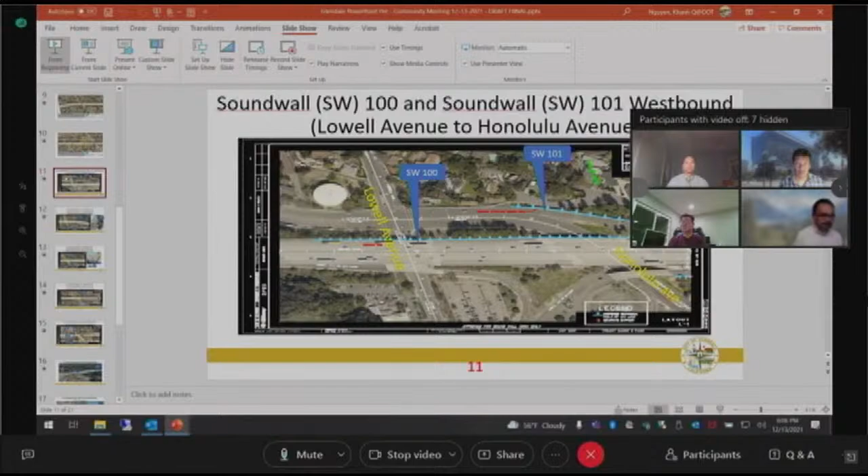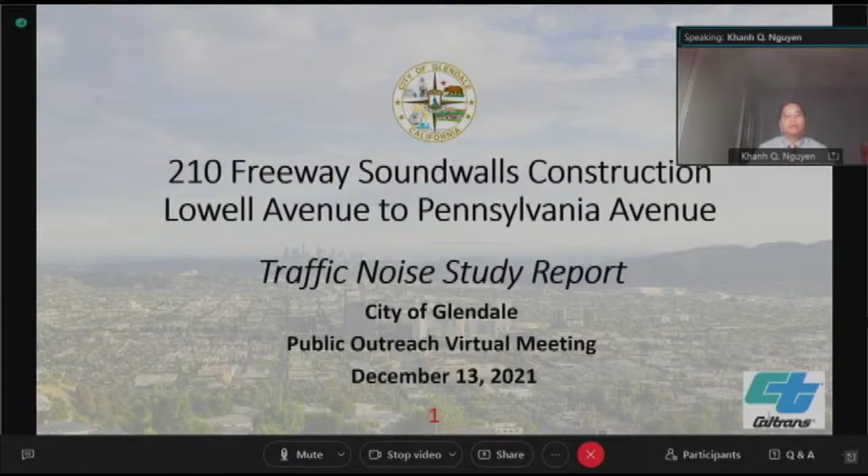Good evening, everyone. I am Khanh Nguyen, project engineer for this Soundwall project. First, I would like to appreciate your valuable time attending the outreach meeting. Second, I would like to take this opportunity to thank City of Glendale for your support in preparing the Soundwall project study report, project report, PSR-PR. A Soundwall project at the planning stage. Your feedback and input are really important to us. Soundwall construction will be in Interstate 210 freeway from Lowell Avenue to Pennsylvania Avenue.

From Caltrans with me today, I have Office Chief, Project Special Study, Marco Bueno. Project Manager, Rima Tabaliva. Senior Engineer from Design, Terry Martinez. Senior Engineer from Noise and Vibration, Jin Lee. Senior Environmental Planner, Robert Wang, and myself.

The project background objectives are: the City of Glendale Foothill community has inquired about constructing a soundwall along the Interstate 210 freeway to mitigate the freeway traffic noise. The City of Glendale retained the Department of Transportation, also known as Caltrans, to prepare the traffic noise study report to evaluate the existing traffic noise impact along Interstate 210 freeway in the City of Glendale. The purpose of the noise study is to collect and analyze freeway noise data, and identify type, locations, and dimensions of a sound barrier along the Interstate 210 freeway between Lowell Avenue and Pennsylvania Avenue.

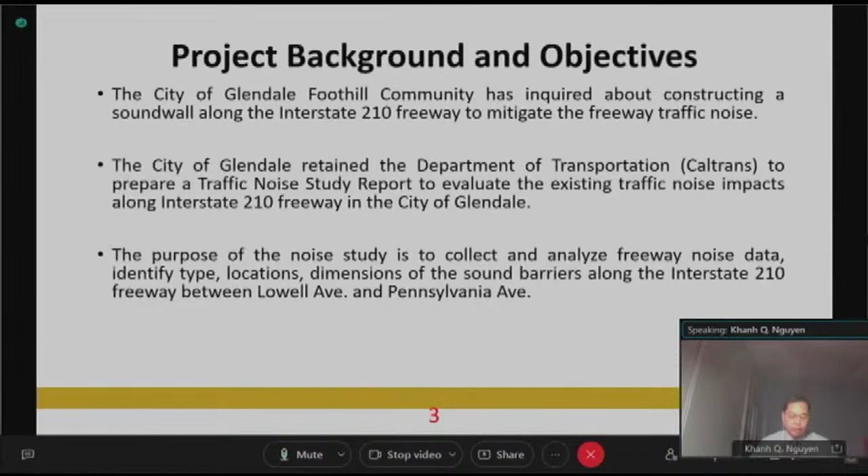There are 5 phases in the project milestone. Phase 1, prepare environmental document, including the traffic noise study. Phase 2, hold a community meeting, inform the public of the scope of work and project progress. Phase 3, retain the public or private firm to prepare plans, specifications, and cost estimate for construction phase. Phase 4, secure proper funding for construction phase of the sound barriers. Last phase, phase number 5, is prepare project schedule, advertise, and award for the construction phase.

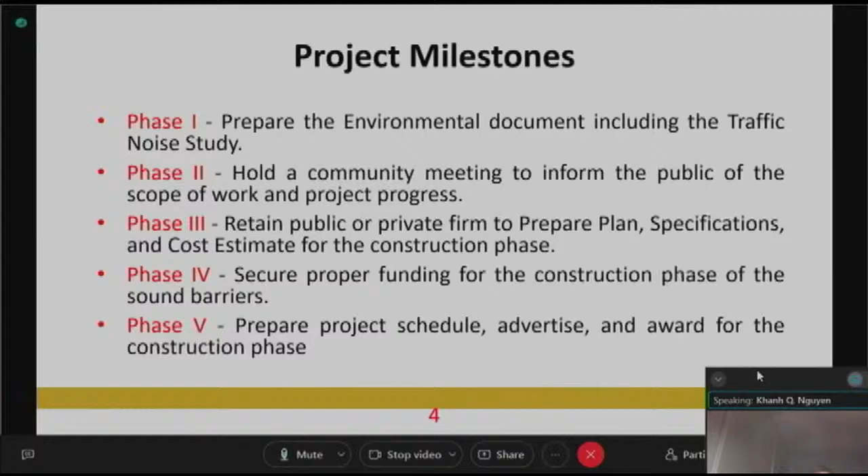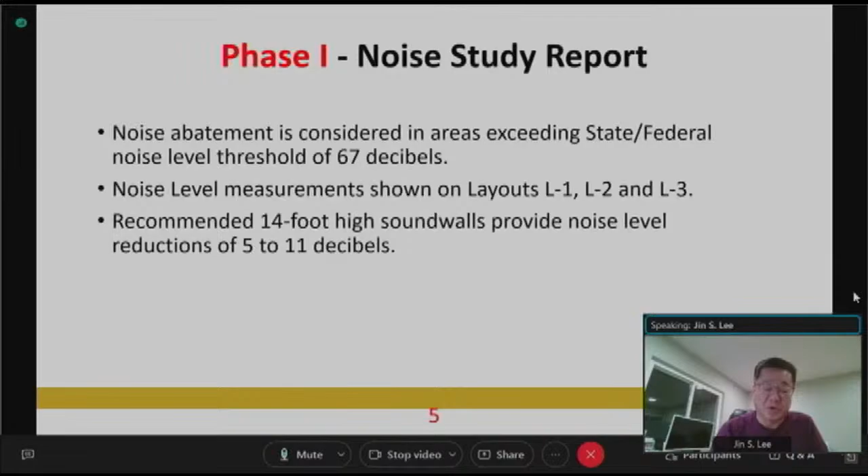This slide, I will have Jin Lee, who is a senior engineer from Noise and Vibration, to talk about this one. Good evening. My name is Jin Lee with Caltrans, Noise and Vibration. For this slide, I would like to provide a brief overview of the state and federal noise policies, as well as some sound wall noise reduction information.

First of all, in order for residential homes to qualify for noise barrier or noise abatement consideration, the noise levels have to be at least 67 decibels or above. Another criterion is that the homes along the freeway have to predate the construction of the freeway. In this area along the 210 freeway, I believe most homes predated the 210 freeway, so most of the area does qualify for noise abatement

considerations. Later on, I'll be showing the noise levels that we measured along the 210 freeway between Lowell Avenue and Pennsylvania Avenue. Based on our study, much of the area qualifies for noise barrier considerations. Based on our computer modeling and analysis, we determined that the 14-foot high sound wall between Lowell Avenue and Pennsylvania Avenue provides a noise reduction of 5 to 11 decibels to the nearby homes.

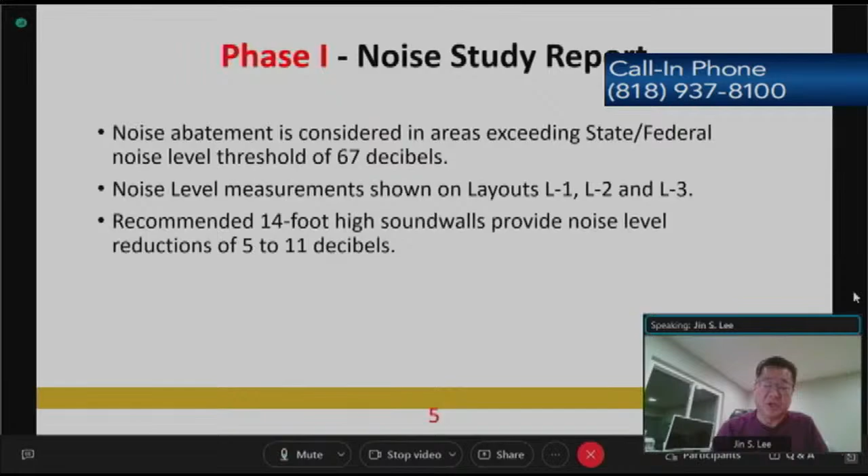This does not mean that everybody behind the sound wall will benefit. The sound wall or noise barrier is most effective for homes about 300 to 400 feet from the sound wall. Anything farther away than that, the amount of benefit diminishes, any change in the noise levels. In terms

some people perceive a change of 3 decibels. A 5 decibel change is readily perceivable by normal human ears, and a 10 decibel change is considered half as loud or twice as loud, whether the noise level increases or decreases. Okay. For this area, 5 to 11 decibels, so it does provide sufficient benefit to the

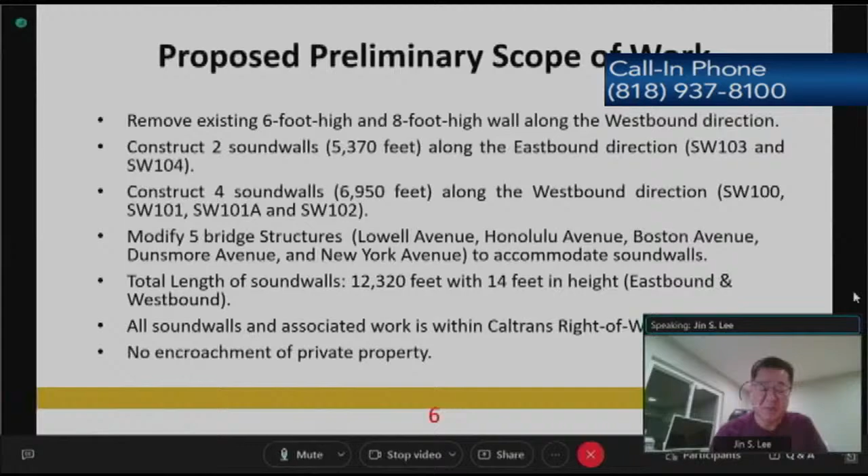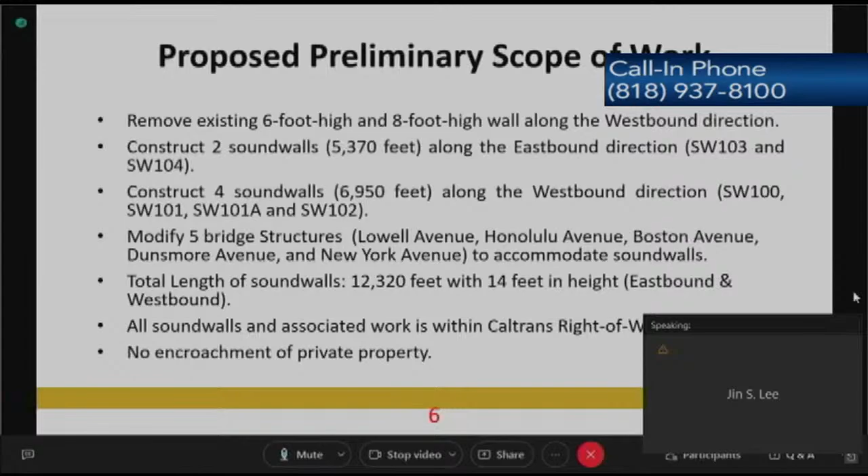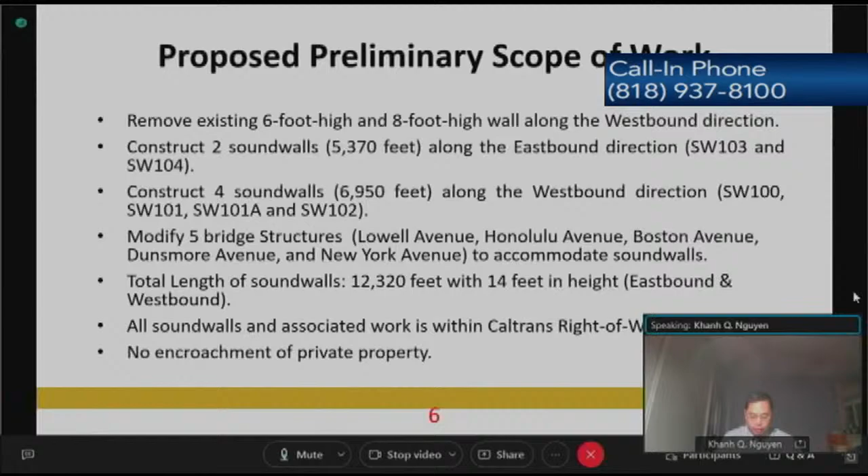Thank you, Jin. So this one is the proposed preliminary scope of work. We will remove the existing 6-foot high and 8-foot high walls along the westbound direction. Construct 2 sound walls along the eastbound direction, with a total length of 5,370 feet. The sound walls are named sound wall 103 and sound wall 104.

Construct 4 sound walls along the westbound direction, with a total length of 6,950 feet. The sound walls are named sound wall 100, sound wall 101, 101A, and sound wall 102. To accommodate the sound walls, we need to modify 5 bridge structures, located on Lowell Avenue, Honolulu Avenue, Boston Avenue, Dunsmore Avenue, and New York Avenue.

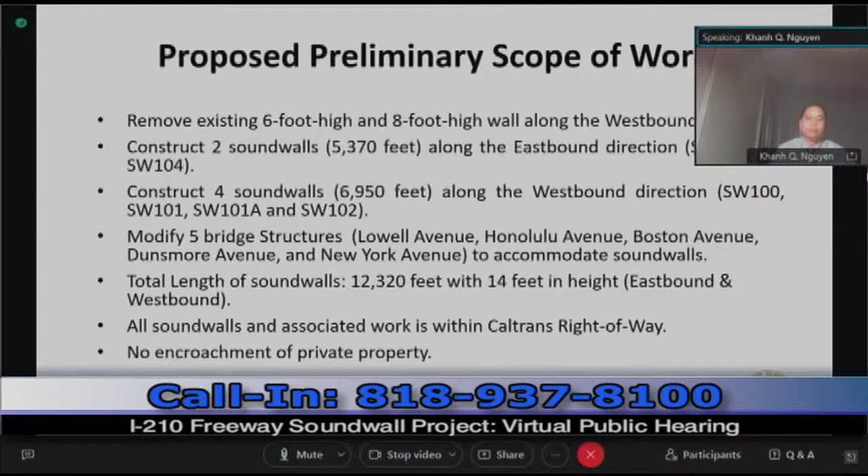The total length of the sound walls is 12,320 feet with 14 feet in height, in both the eastbound and westbound directions. All sound walls and associated work are within Caltrans right of way. No encroachment of private property. The project limits are from Lowell Avenue to Pennsylvania Avenue, 1.21 miles long.

In the eastbound direction, Sound Wall 103 starts from the Lowell Avenue on-ramp to the Pennsylvania Avenue off-ramp. The length of Sound Wall 103 is 4,790 feet. Also, Sound Wall 104 is on the Interstate 210 freeway, eastbound direction as well. It's 580 feet long.

In the westbound direction, Sound Wall 100 is on the 210 freeway, located at the Lowell Avenue overcrossing, with 1,360 feet in length. Next, Sound Wall 101 runs from the Lowell Avenue off-ramp to the Pennsylvania on-ramp westbound. It is 4,980 feet long.

Next, we have Sound Wall 101A, which extends from Sound Wall 101. It is only 232 feet long. Last but not least is Sound Wall 102 on the Interstate 210 freeway, westbound direction. It is 377 feet long.

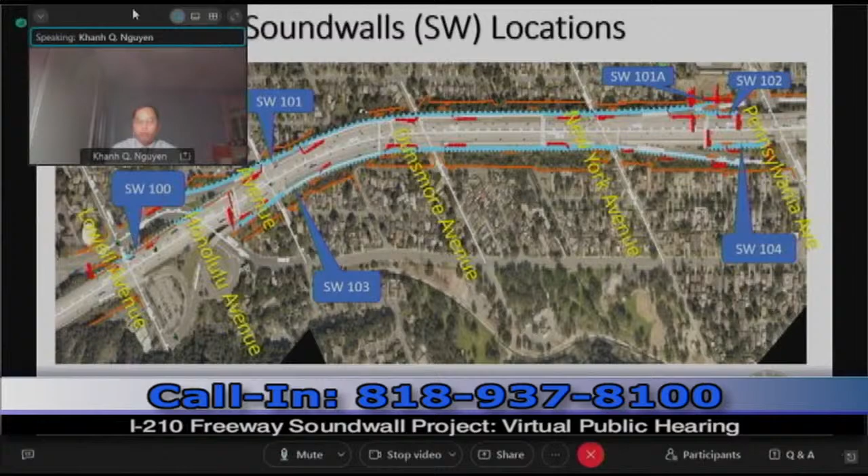So I would like to invite Jean back to talk about what it means to you. Jean, are you there? So I guess Jean is having difficulty with the internet. He will come back later on, so I can move on with this one.

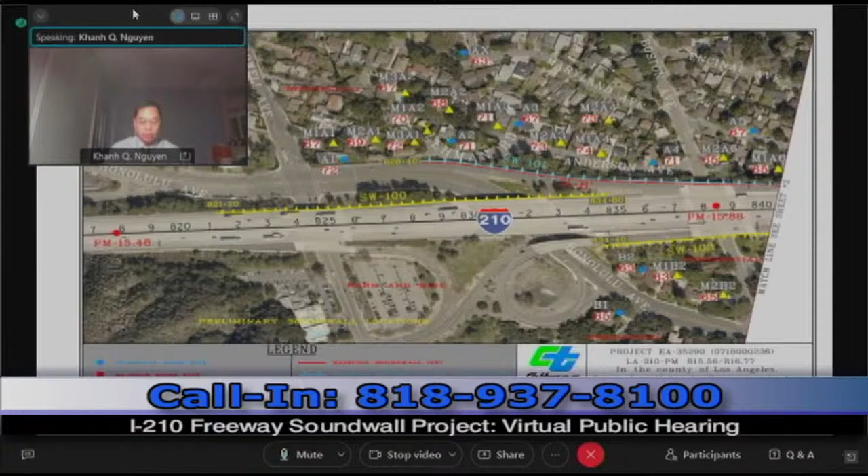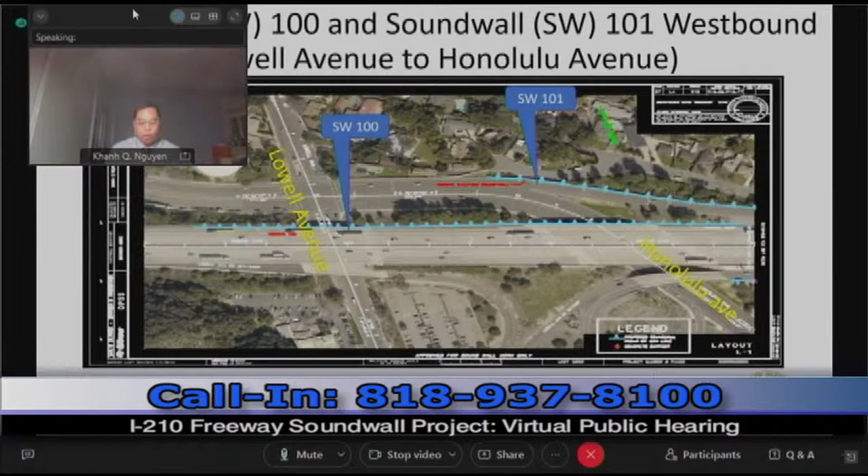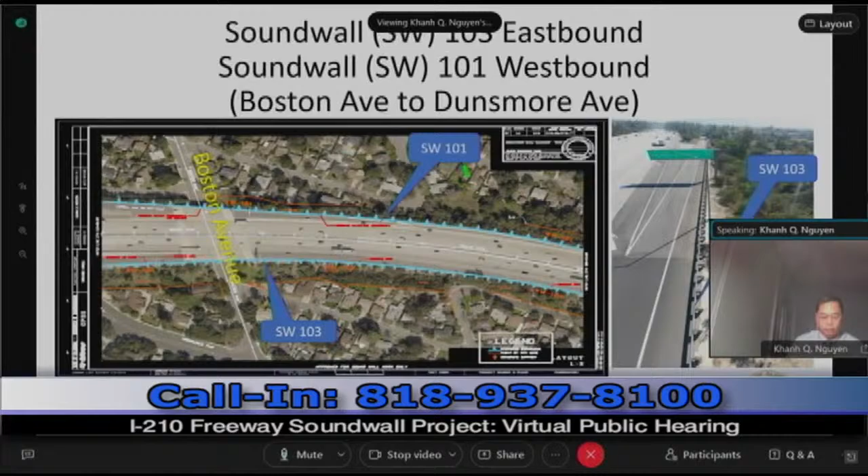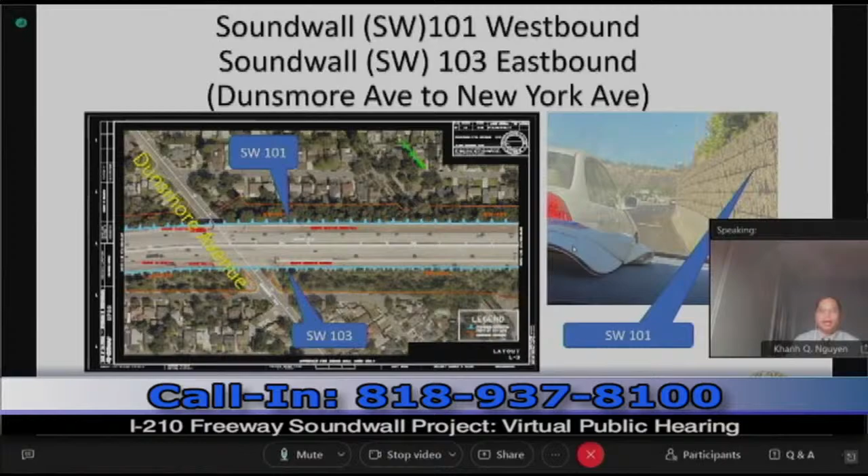So this slide is a blow-up of Sound Wall 100. It is on the Interstate 210 freeway. And this is Sound Wall 101 on the Lowell Avenue off-ramp. As you can see, the guardrail will be replaced by Sound Wall 100. The existing 6-foot high wall will be replaced with the 14-foot Sound Wall 101.

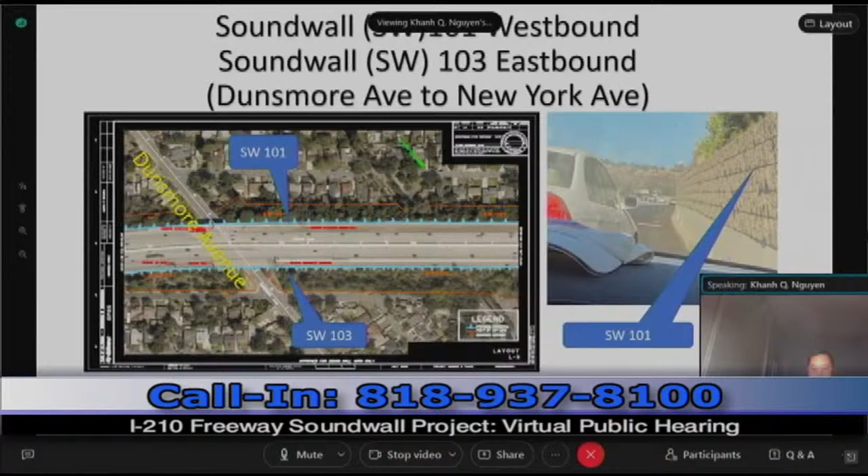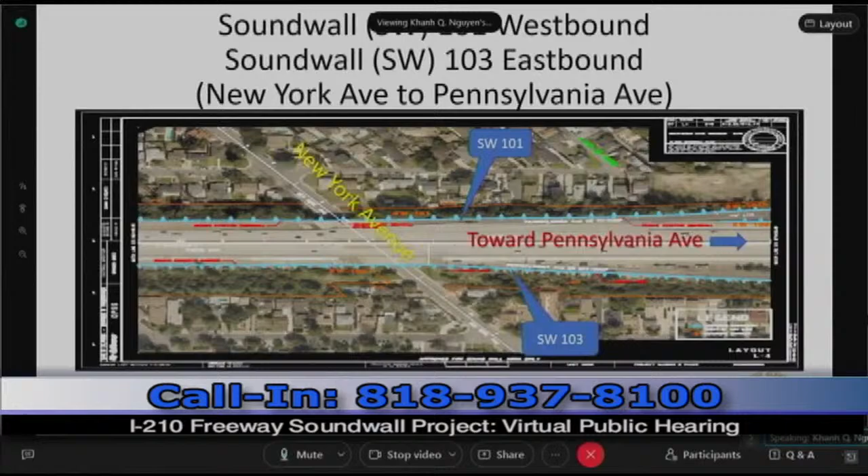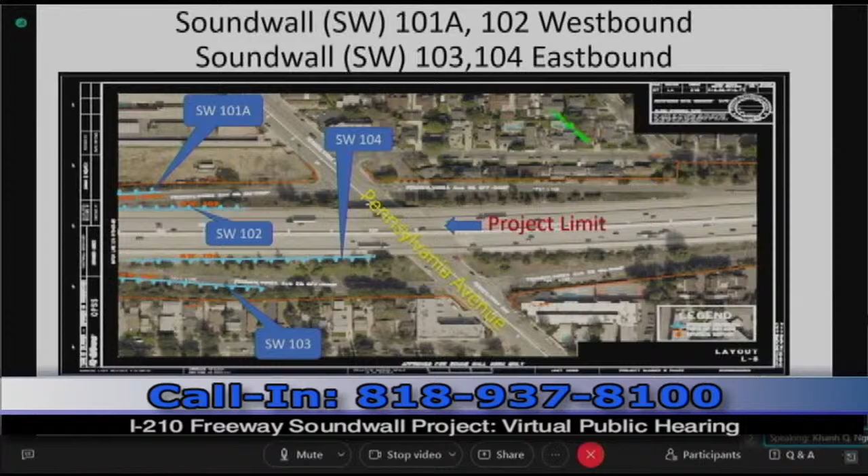This one is the blow-up where Sound Wall 103 and 101 are at the New York Avenue overcrossing. Again, this is Sound Wall 104, which will be constructed on Interstate 210 freeway. Just another look at Sound Wall 103, where this one will be constructed at the beginning.

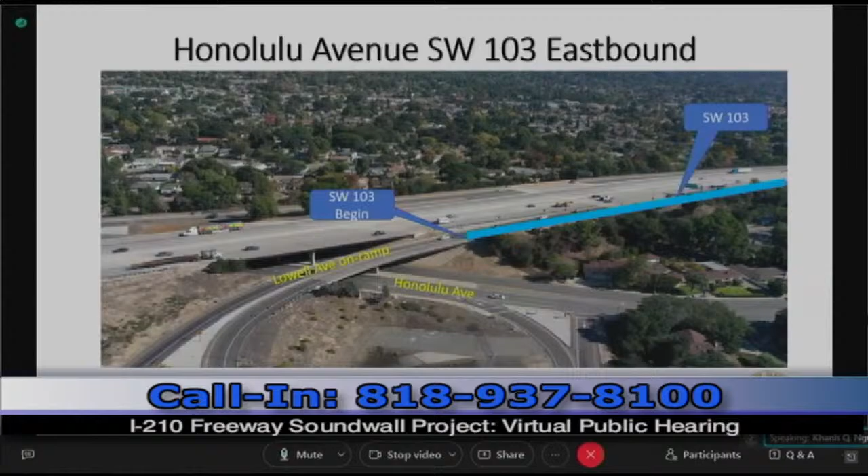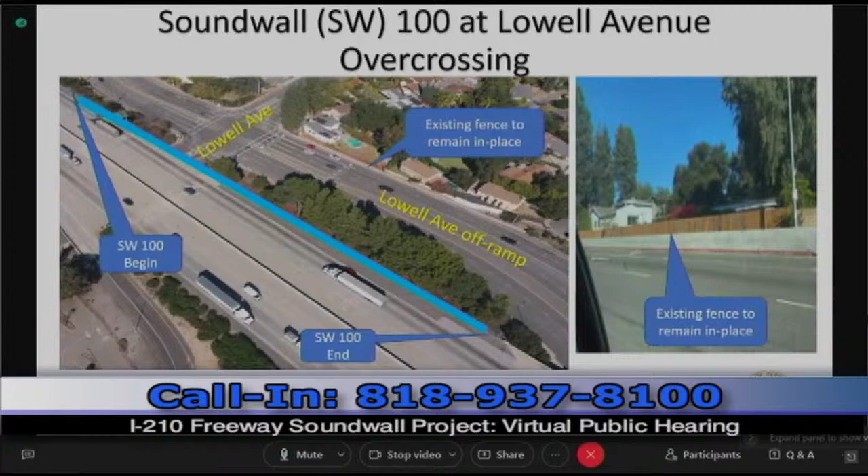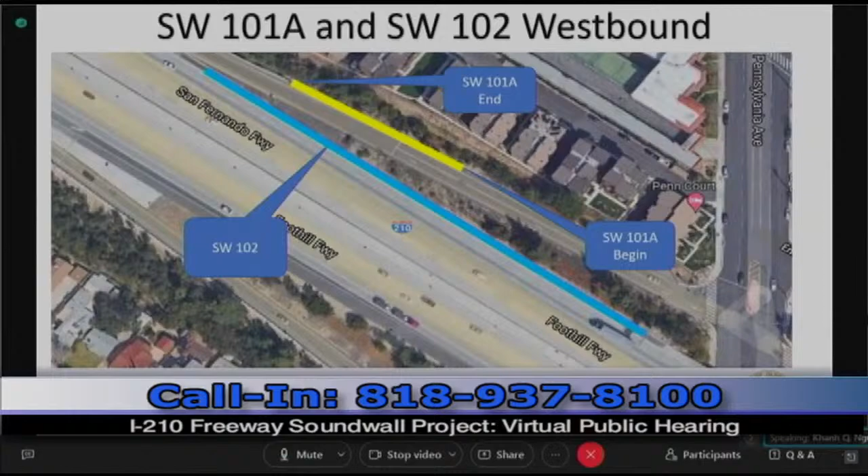The existing fence is to remain in place. We're not touching it. This is where Soundwall 101A starts and ends. And also you can look at Soundwall 102, which will be on the Interstate 210 freeway.

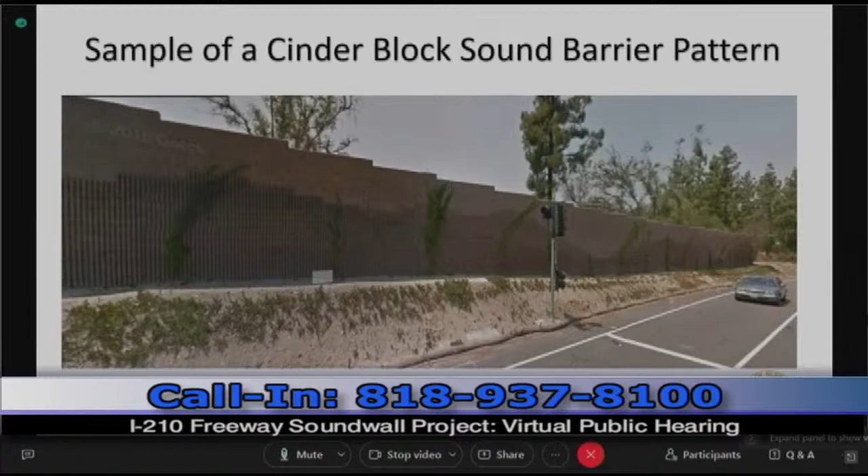This is a sample of the proposed soundwall. The design, texture, and color will be determined by the City of Glendale. Project design, funding, and construction phases. The total estimated project cost is $50 million. Project estimated design and construction support cost, $14 million. Project estimated construction cost is $36 million.

The project funded by City of Glendale's Measure R Sub-Regional Fund is $20 million, available right now. $30 million additional funding is needed, to be determined later on. Begin design and construction will be determined by City of Glendale.

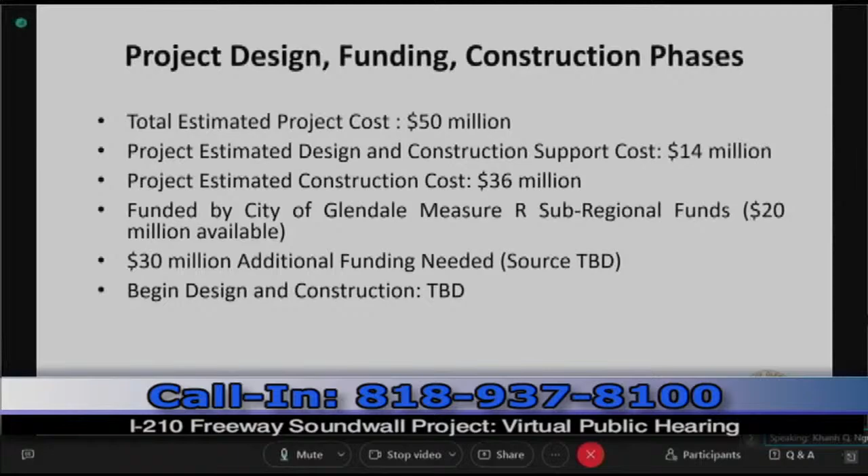With that, do you have any questions for me? By the way, project and contact information. There's a link here. You can click into it, then it will go directly into the City of Glendale. Project manager from City of Glendale, her name is Jasmina. With that, if you don't have any questions for me, I conclude this presentation.

This is Jin Lee. I got disconnected from my internet, so I'm back. Jin, can you talk about the legend, please? Let me try to do that. Okay. Jin Lee, you're up.

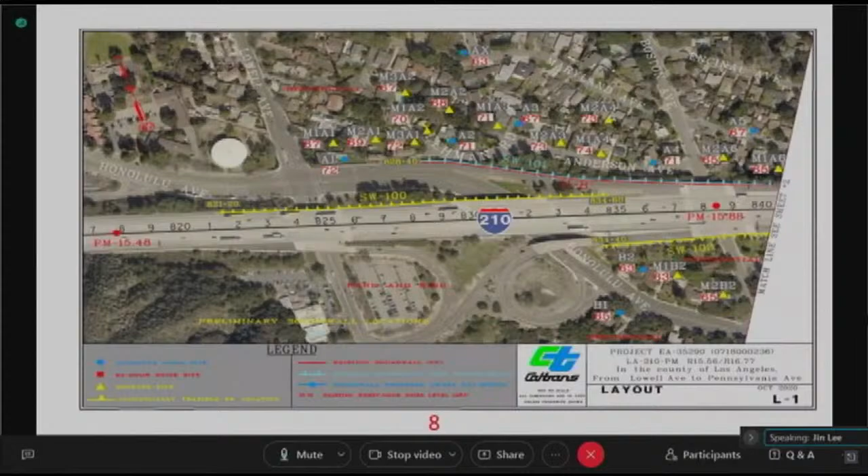Yes, basically, as I mentioned before, as part of the noise study that we performed for this project, we conducted several dozen noise measurements, both north side and south side of the 210 freeway between Lowell Avenue and Pennsylvania Avenue. The red numbers you see on this layout are the peak noise levels that we determined from our measurements. So as you can see, most of the area within a couple hundred feet of the freeway is above 67 decibels, up to 72, 73 decibels. This noise level represents the community noise level currently.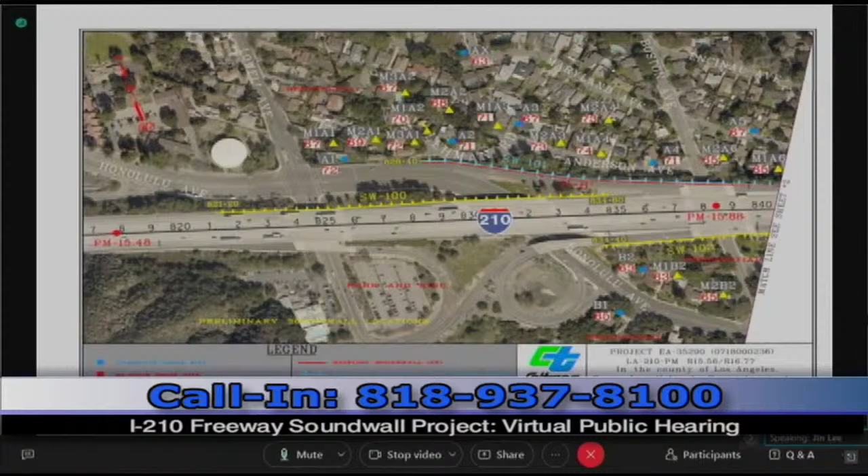And after the soundwall is constructed, this noise level should go down to probably around the mid to low 60s decibel range, which provides adequate noticeable reduction to the community. So the next slides 8, 9, 10 show the noise levels along the community that we measured, and you can see from the numbers that the noise levels do exceed 67 decibels, up to 72, 73 decibels.

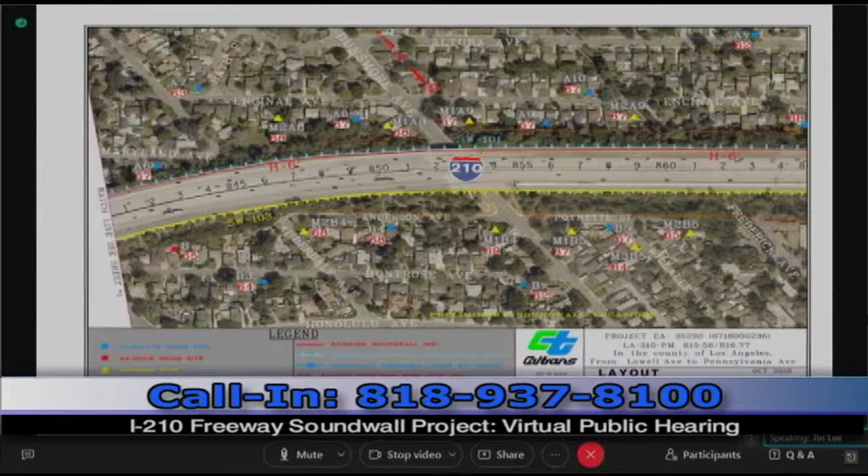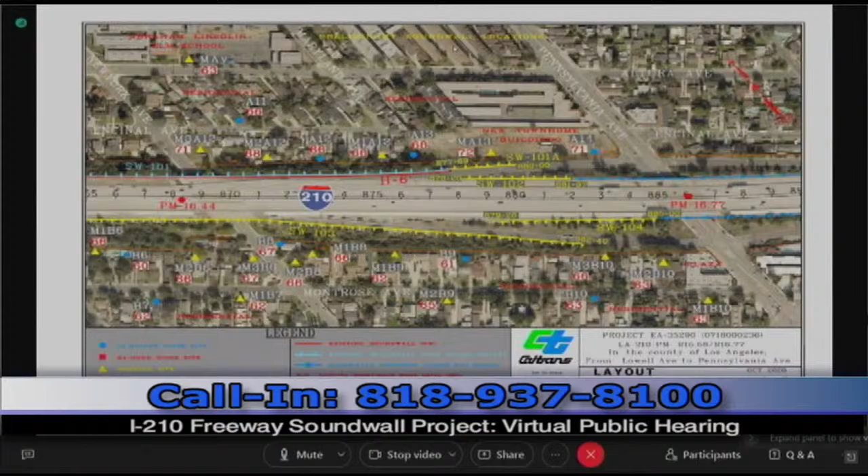I believe the presentation is completed. Mr. Wan and Lee, thank you for your time on that. Please stay with us. Next, we'll be hearing a presentation from LA County Public Works, Mr. Ricardo Gordillo. After his presentation, we'll start taking phone calls for the public to ask questions to either agency, but mainly this project is a City of Glendale project. The focus for the questions will be more on the presentation provided by Caltrans.

The county is here more as a courtesy because they are our next door neighbor, and should the public have a question about why the wall stops at a certain point and not another point, this is based on the jurisdiction, and we're very happy to have the county with us to give a brief overview of their project.

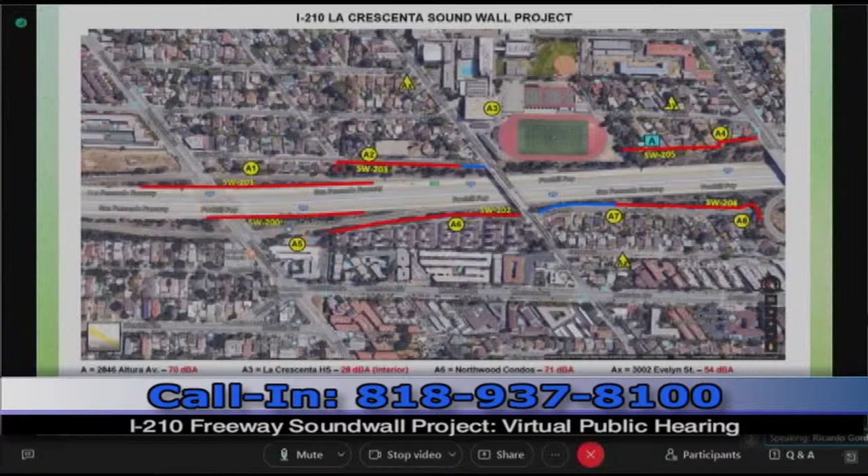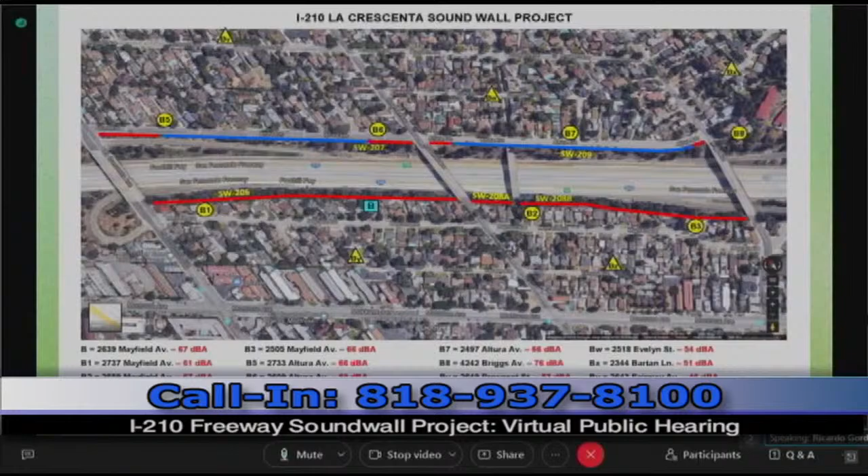If you can go to the next couple of slides, so we can see the location proximity of the sound walls. Right, and that's what I was looking at when we were trying to determine what the best sound walls were to build. If you can go to the next one also. And basically, it covers the whole length of the proposed sound wall locations within the unincorporated area of La Crescenta and Montrose. And as you can see, it ends over here by the Foothill Freeway.

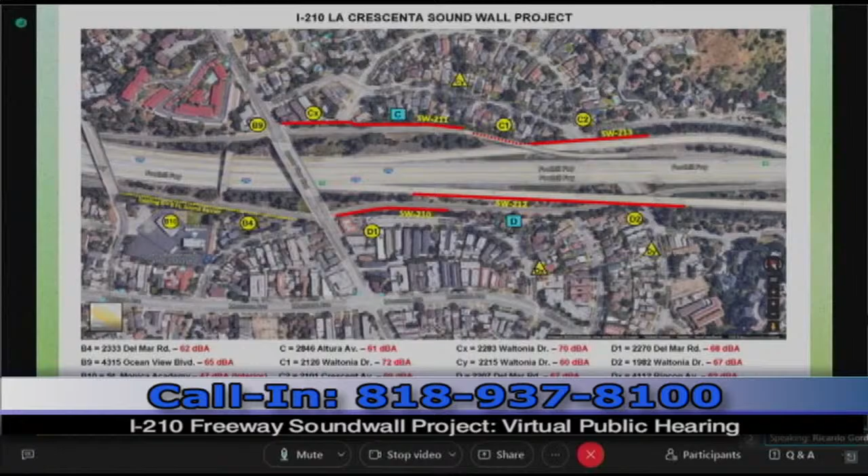Now, after I did all my number crunching, if you go to the next slide, I proposed that based on the funding that we currently have available that is secure, 3.044, we also have $6 million available to build the sound walls that we can build, which brings it to a grand total of $9 million. It's not a lot of money. So I explained to them, I wish I could build all of them, but the grand total for all of that was something close to $60 million. So we had to make choices. We had to make decisions about what was going to be built. If you go to the next slide, please.

And I propose, based on the findings that the NBSSR determined... sorry, the next one. The best sound walls to build were east of Ocean View, to the 2 freeway. So that's it. Of all the sound walls that I showed them, the only ones that we can afford to build right now are these 2, and that total cost for construction was $7.5 million. I'm sorry, that's not just construction, that's also PS&E and everything, the whole right-of-way, everything.

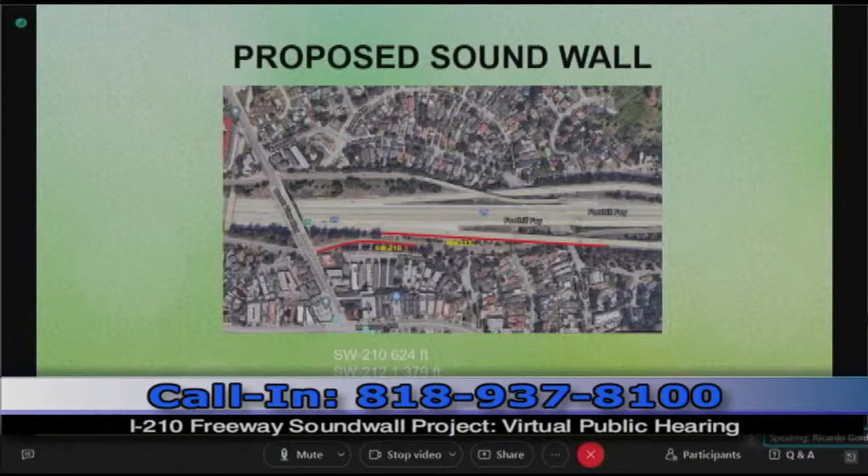I did propose this as a potential project to build all the sound walls along this freeway, but we're very much at the very beginning of the decision-making process. So I just proposed it. I'm crossing my fingers that it'll get funded because it is a worthwhile project. But that's where we are in the unincorporated area. And that concludes my presentation.

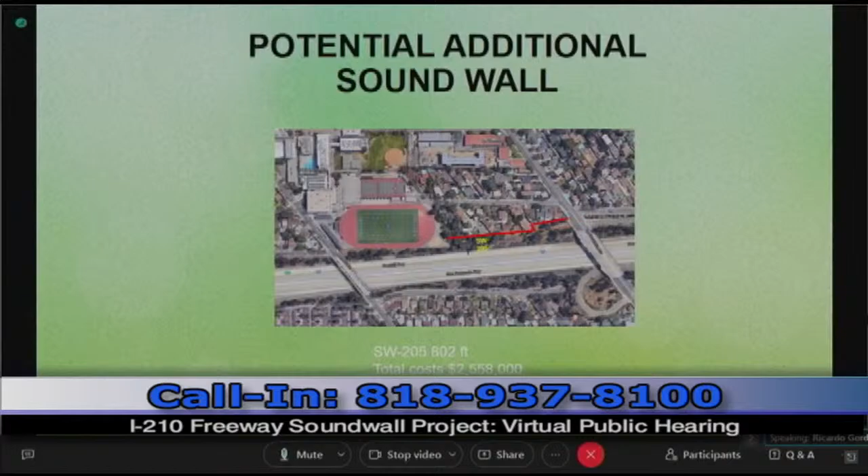Thank you. Thank you for your help. Thank you so much, Mr. Gordillo.

We concluded 2 presentations given by Caltrans staff and the LA County Public Works staff, and we're open for phone calls from the public. I'll go ahead and provide the numbers to call in for questions or comment. Any caller will have 2 minutes to either make a comment or ask a question. The phone number is 818-937-8100.

And for the public who join us just to hear the presentation or hear the questions and answers, please call 213-306-3065 and use access code 2557-136-2248, followed by a #. Then please enter the meeting ID number 8829-7725.

So we'll be waiting for the public to join us for any questions or comments by calling that number, 818-937-8100. Okay, thank you. The number is on the screen to call in. Mr. Hiti, you have some calls, and I will open up the phone line. Excellent. Go ahead. Please state your name and your address.